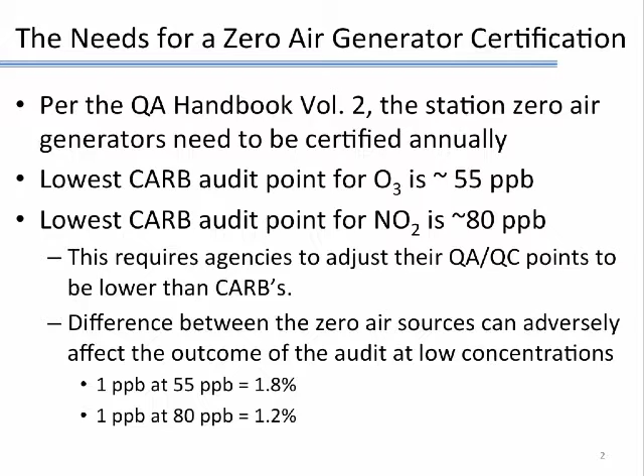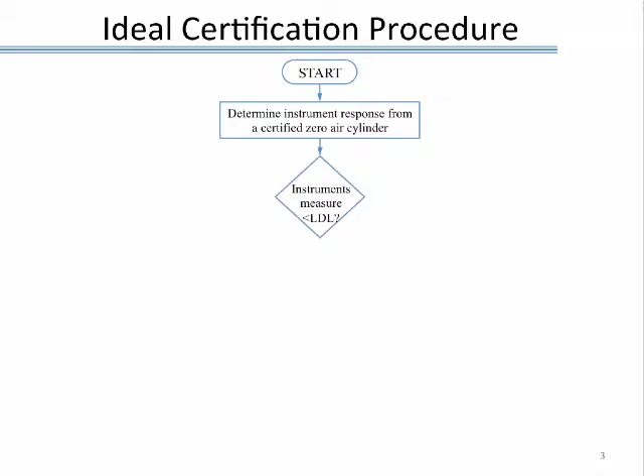So what is the ideal certification procedure? Well, first, we're going to determine the instrument's response from, say, a certified zero air cylinder. Then we're going to determine, is the instrument measuring below the lower detection limit? If the answer is yes, that's great. Then we can go on and compare the instrument's response to the zero air generator.

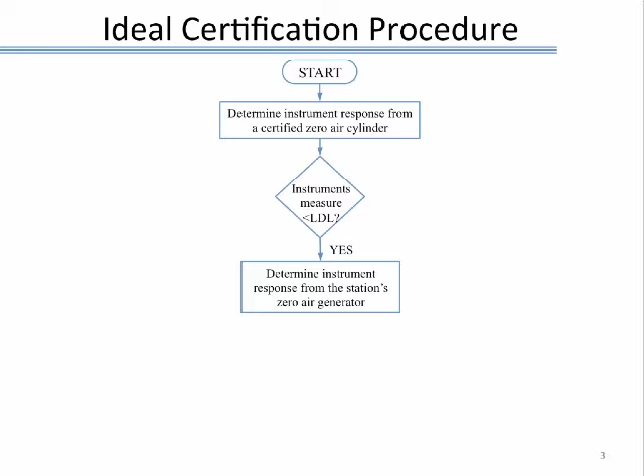If the answer is no, because this is a certified zero air cylinder, we know that this elevated zero is really just due to probably a calibration error, calibrating a little high, or maybe the instrument drifted. So now you can just adjust the background coefficients or the zero coefficients, and then directly move on to determine the response from the zero air generator.

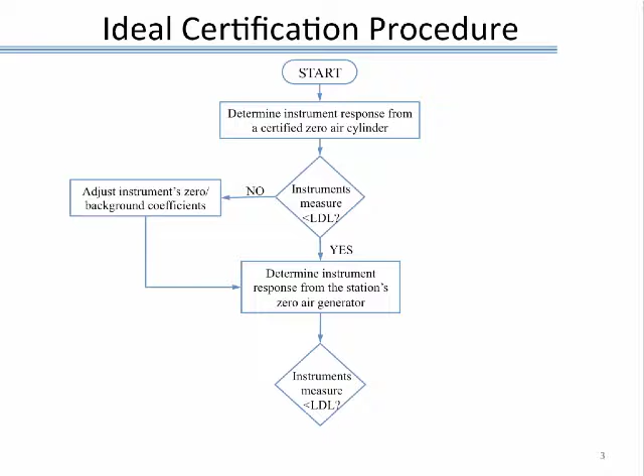Now, when you do that, you can ask yourself, is the response from the zero air generator less than the lower detection limit? If the answer is yes, then you know that your zero air generator is certified to be clean and you can move on. If the answer is no, then you need to maybe make some modification to your zero air generator.

Maybe the scrubbers need to be changed. Maybe the zero air generator is just not up to spec. Maybe you have an older version. Maybe you need to buy a new one.

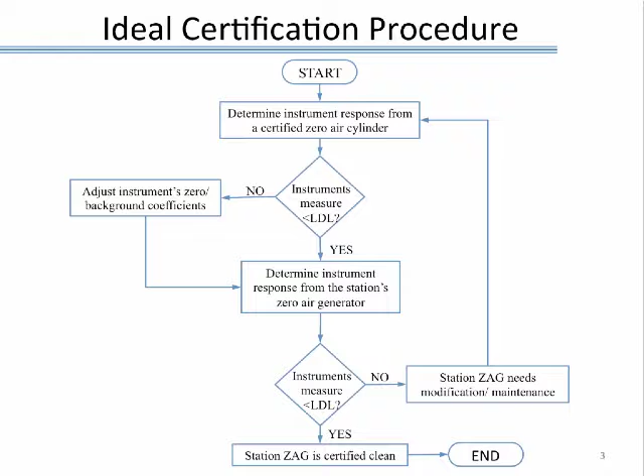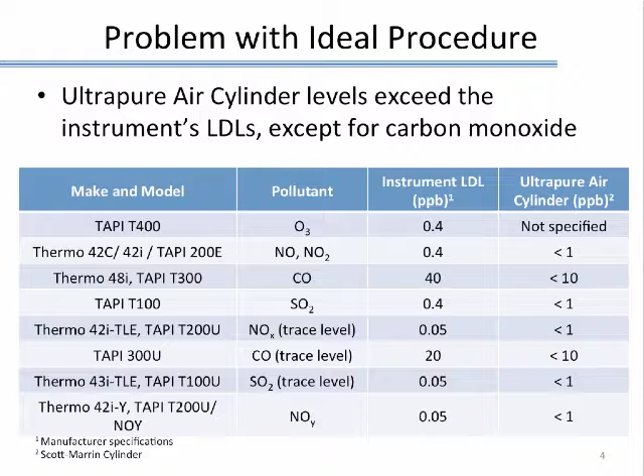So San Diego decided, you know what, we're going to get rid of the cylinder and we're going to come up with our own procedure. Our own procedure is we're going to take the best available zero air generator that's on the market, and we're going to connect that to a clean sampling manifold that's only used in this certification process. We're going to analyze the output from this, what we now are going to call a reference zero air generator.

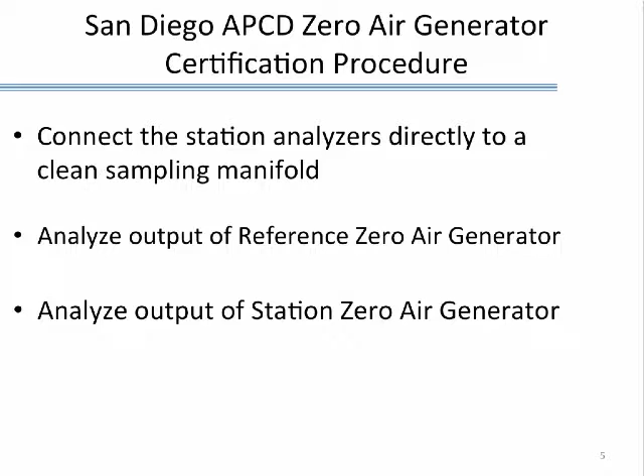We're then going to disconnect that and connect up our station zero air generator and analyze the instrument's response to that. Then what we're going to do is take the output of the station zero air generator and run it through an external scrubber system to see if just running it through additional scrubbers will lower the concentrations.

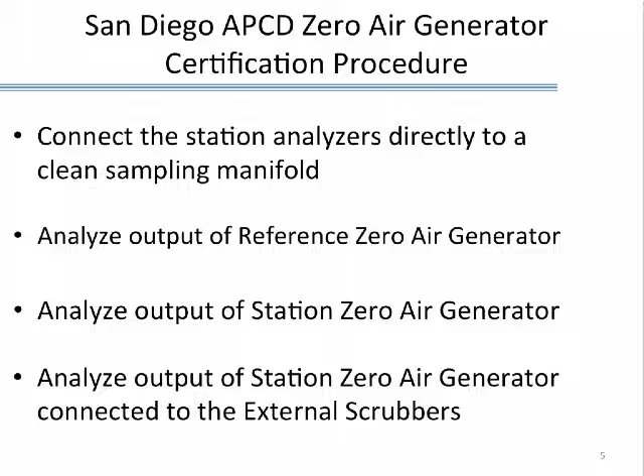So how did we come up with what was the best available technology? This is just a little table here of different instruments. You've got the cylinder there from Scott-Marrin, based in Riverside. You also have 3 manufacturers there. And the one that we decided to go to was the Teledyne API 701H.

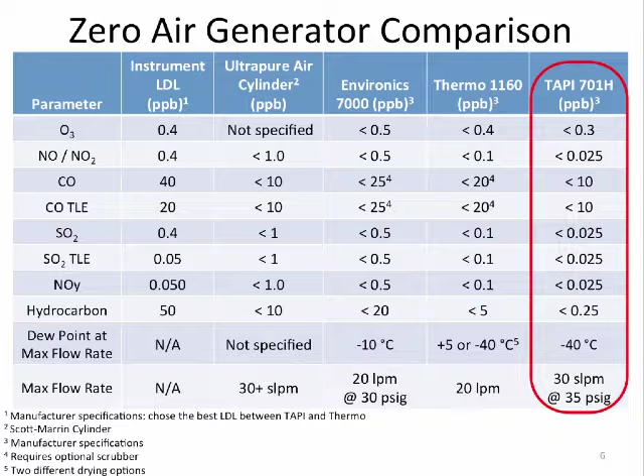And one of the things that we wanted to do when we looked at what is for our external scrubber system, we wanted something that was really simple. We wanted something that's portable. We don't want to have, if we have 9, 10 stations, we didn't want to have 10 of these. We wanted to have one of them. So we wanted to have something that was easily portable. We also wanted something that we don't have to be super cautious with, like using a hydrocarbon scrubber that has to heat up to 300 degrees C. So we wanted something very simple.

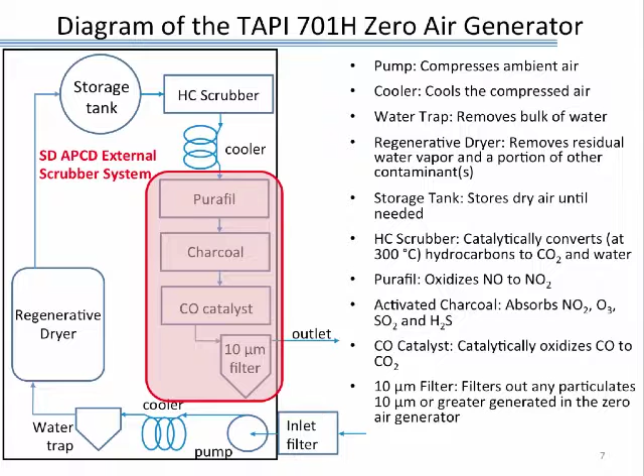So what we did was we took all the scrubbers out of the 701H that didn't need any electricity, and we just mounted that onto a board.

So here's our setup of our procedure. Here what we do is we can connect either the station or the reference zero generator to a valve to throttle back and give us just the amount of flow that we need, into an 8-port glass manifold that we connect our instruments to. This particular site has NOx, CO, SO2, and ozone.

We plug the other ports except for one last one, which we connect to a rotameter, and we measure the excess flow there. The reason we measure the excess flow instead of just feeling for it with our hand is that there is such a thing as too much excess flow. If you have too much excess flow, you end up building up pressure in the glass manifold, and that affects your ozone instrument tremendously.

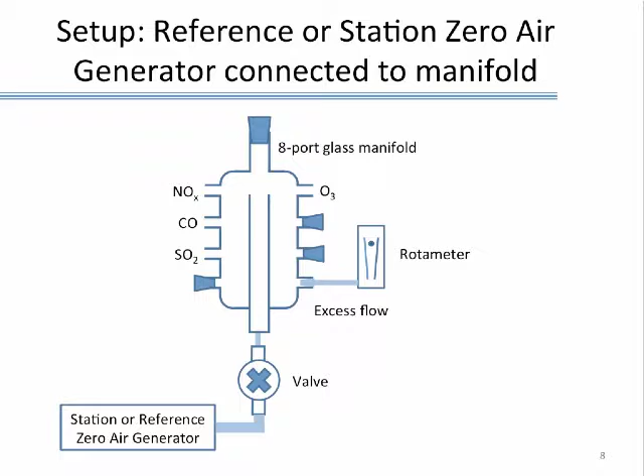So if you have a really high flow in there, you'll end up getting a really big negative spike on your ozone reading. We've seen it down to negative 10 ppb, and it takes about an hour before it reaches zero again. So you definitely want to make sure that you don't overpressurize that cell.

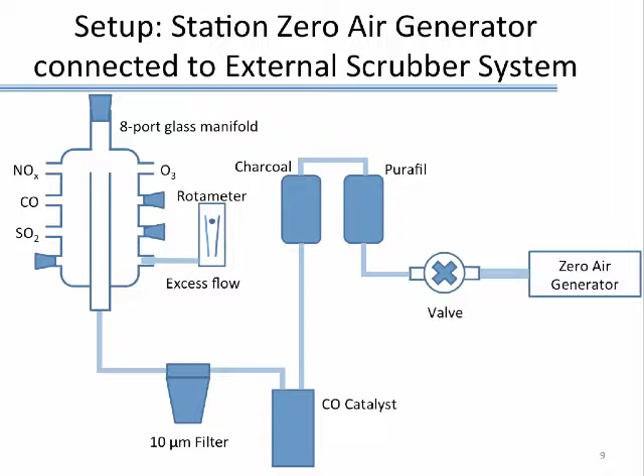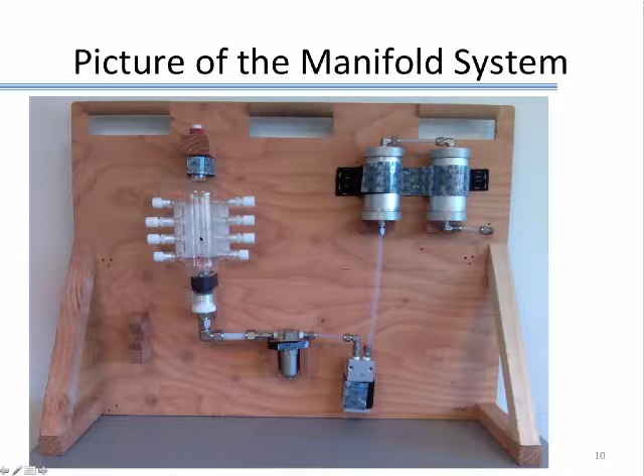So the other thing that we decided to do, to ensure that our reference zero generator is running optimally, is to change out the scrubbers on a pretty quick basis. In reading the manual on the 701H, it tells you that you should change out the Purafil and the activated charcoal on a yearly basis. So we're going to do that for the station as well as the reference zero generator.

The CO catalyst and the molecular sieve, they pretty much said those are good for the life of the instrument, but they can become poisoned, so you should change those out periodically. On our reference unit, we're going to change those out yearly. On our station units, we're going to change those out every 2 years. And the external scrubber system, since it's only used for a short period of time, just a few times during the year, we're going to basically take the ambient station schedule and double that.

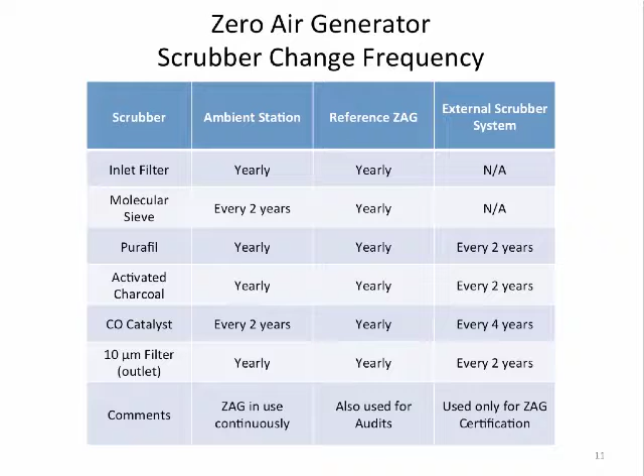The other thing we did was we developed QA/QC criteria for what constitutes a pass and what constitutes a fail. One of the things we wanted to address is that when we measure the value of the reference or the instrument's response from the reference or the station, that value needs to take into account instrument drift. Maybe you calibrate, maybe you've got an older ozone instrument and you can't get a perfect zero, so you calibrate it with the zero being 1 or 2 ppb. So we want to take into account instrument drift.

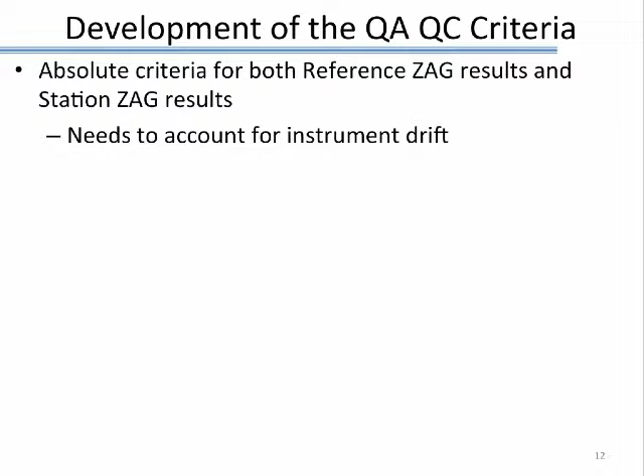So what we did for the zero generator certification was take our as-is calibration limits. For ozone and NOx, that's plus or minus 5 ppb, and for CO, that's plus or minus 0.6. This takes into account our final calibration zero limit tolerance, as well as the EPA 24-hour drift requirement, which is plus or minus 3 ppb for ozone and NOx, and 0.4 ppm for CO.

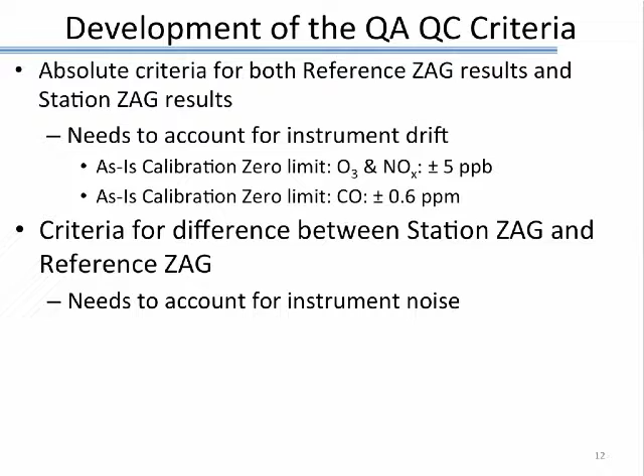The other thing we wanted to do is, if we measure the reference zero generator and measure the station, the difference between them needs to be within a certain amount, and that needs to take into account the instrument noise. Everybody knows that when you measure zero on an instrument, it doesn't read just zero—it bounces up and down. So we need to take into account the instrument noise. What we did was take 3 times the RMS noise, and the RMS noise of each instrument is a manufacturer's specification.

So we felt testing 3 times would give us a good idea that there is a real difference between the two zero generators.

The other thing we wanted to know is if we took that station zero generator and ran it through additional scrubbers, and if that value dropped significantly, that indicates the station zero generator needs either servicing, maintenance, or replacement. So what is that value? Well, it needs to take into account instrument noise, and again, we chose 3 times the RMS noise.

So this is just going to be a flow chart that goes through those criteria and how we determine if it passes or fails.

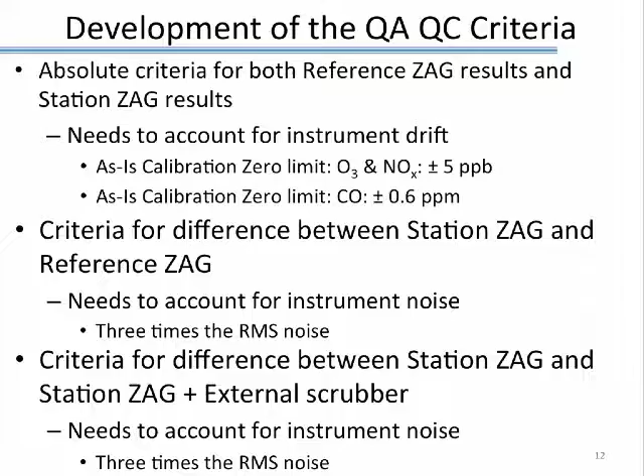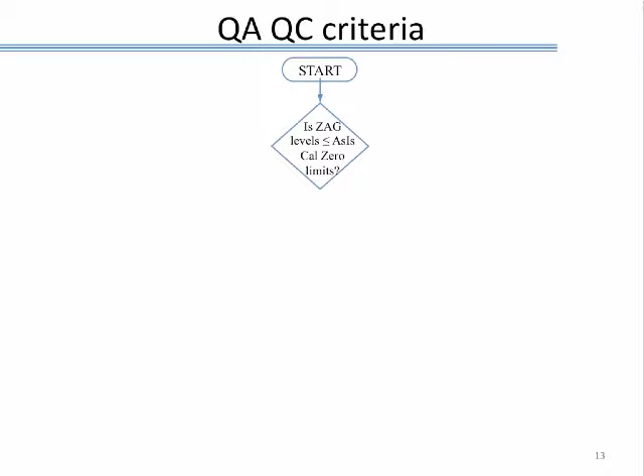The first thing we do is run the reference zero generator and get the instrument's response to that. Then we look at those values: is that value less than or equal to our as-is calibration limits? If the answer is no, then there's something already wrong, and you need to address that issue, investigate it, maybe issue a corrective action notification, resolve the issue, and then start over.

Let's say the reference value is less than the cal limits, and the station is less than the cal limits. Now we look at the difference: the response from the station zero generator minus the reference zero generator. Is that less than negative 3 times the noise?

If that difference, the station minus the reference, is less than negative 3 times the noise, what that indicates is that the station value is much less than the reference value. Well, we've already decided that the reference one is the best in the network, so how can we have a station one that's less than that? That indicates something is wrong. This could mean your reference zero generator needs its scrubber changed, maybe it got contaminated. So replace it, fix it, and start over.

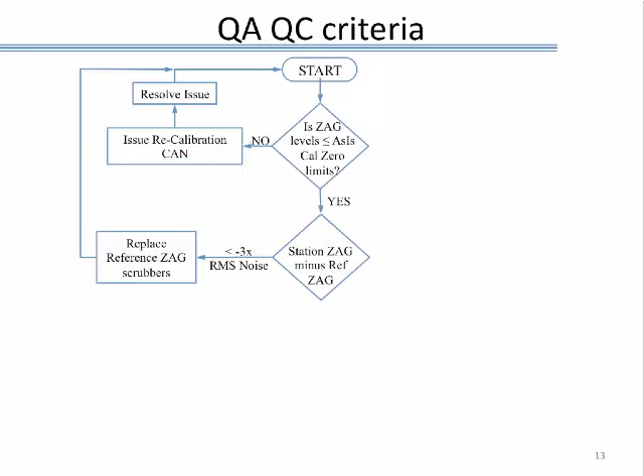Let's say it's greater than 3 times the noise. What this means is that the response due to the reference zero generator is much less than the station, so the station is reading significantly higher. This indicates that if you had an identical reference instrument as a station one, you would get better zeros. If it's the same model number, then most likely it means you need to change out your scrubbers.

So let's say it's in between, plus or minus 3 times the noise. Now we can move on to the next step, which is looking at the response of the instruments when they measure the station zero generator versus when they measure the station zero generator coupled with this external scrubber system.

Let's say it's less than negative 3 times the RMS noise again. This indicates that the response when measuring just the station zero generator is significantly lower than when measuring it through the same station zero generator coupled with an external scrubber system. If you scrub it more, it should be lower, so how can it be higher? This indicates maybe you have a leak in your external scrubber system, or maybe they're poisoned or contaminating. This needs to be resolved, and again, start over.

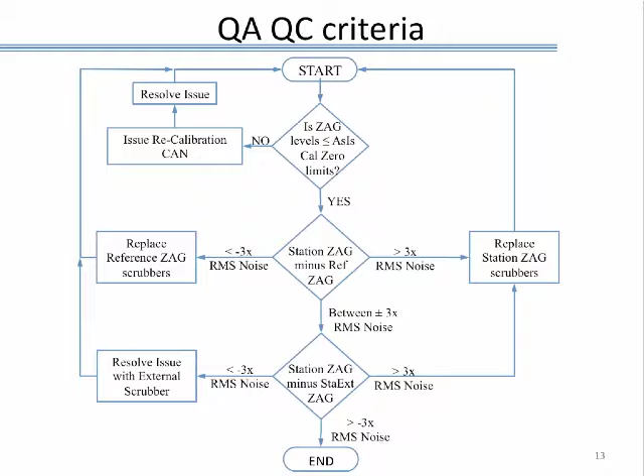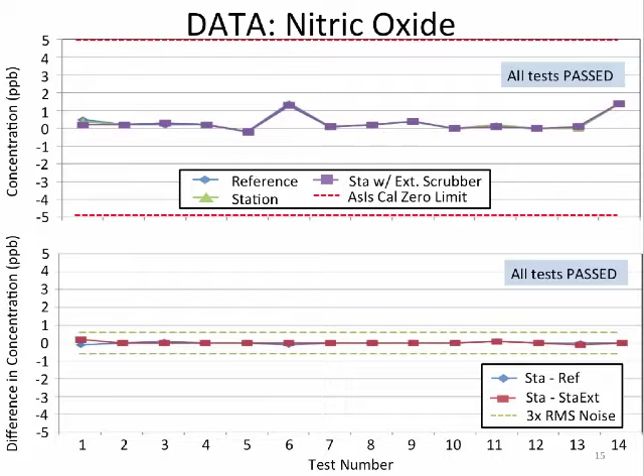Now, what's the cause of this? Well, before we started this, we had our site operators change out the scrubbers on our zero generator once a year, but we really didn't enforce it. It had to be the same month every year. And our site operators change stations every year, they get rotated.

So some sites have more equipment than other sites. Instead of penalizing one person because he's got the NCore site, and one guy's just got the ozone site, they get rotated around. So it's really up to each operator to see when was the last time it got changed. And sometimes things get busy, special projects happen, and it might go 15, 16, 17 months before the scrubbers get changed. That's probably what happened here.

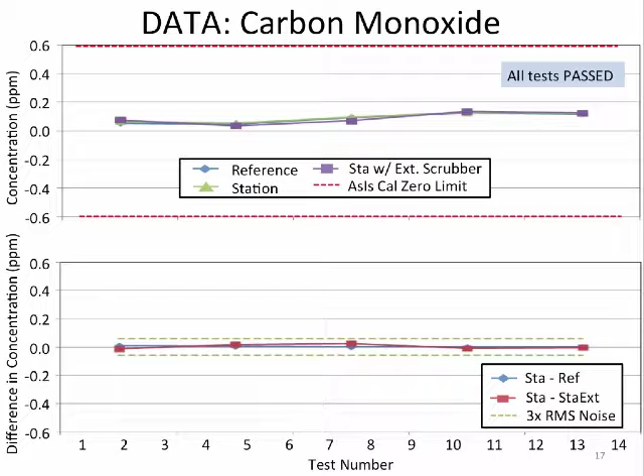So summary and recommendations. Lower QA levels are requiring lower QC levels. Newer technology instruments are making it harder and harder to use the zero air cylinders as your reference source.

Our recommendation is to conduct a certification in a dedicated manifold. That way you don't have to worry about cleaning it to prevent contamination and bias. And really try not to overpressurize it. If you overpressurize, your ozone's going to go really, really negative, and it's going to take a long time.

So what we typically do is run for at least 30 minutes and then take a 10-minute average. But if you overpressurize it, it might take an hour or over an hour. And some of our early tests, we probably did overpressurize it because we weren't measuring our excess flow. That's probably why, if we look back real quick at ozone...

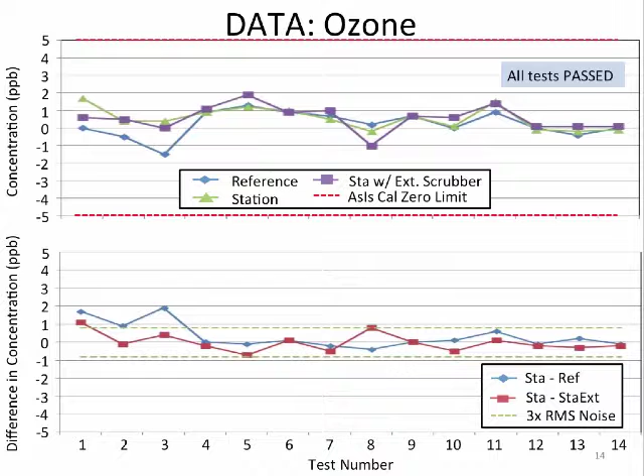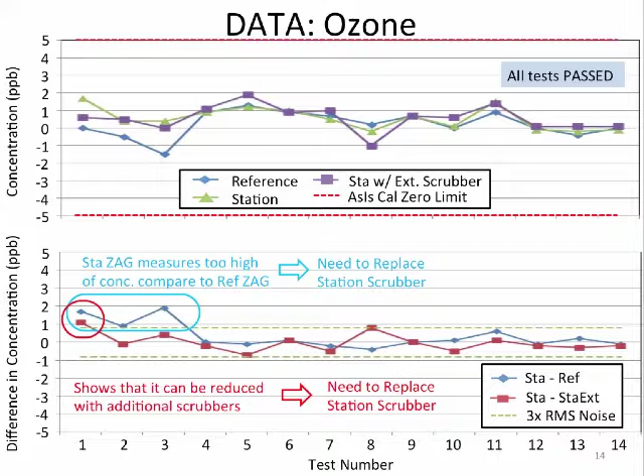On this third test, look at our reference, we're getting about negative 1.5. That probably isn't real. But when we were doing this, we ran for 30, 40 minutes, and we got 10 minutes where it was sitting at negative 1.5, or negative 1, negative 2. If we waited maybe another 10, 20 minutes, maybe it would have been closer to 0. So really don't overpressurize it. We found about 2 or 3 liters per minute of excess is good.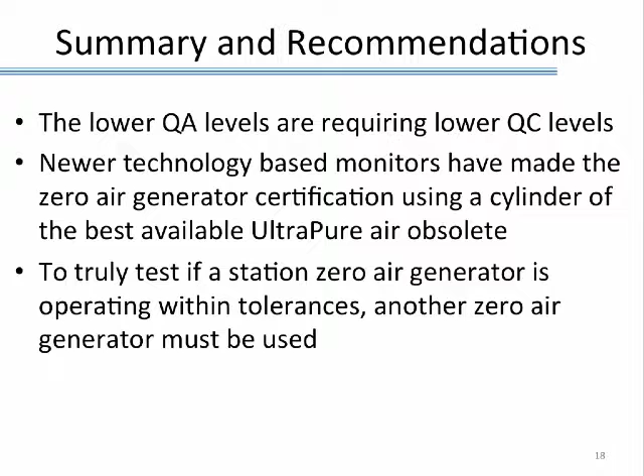And just as a disclaimer, this is something we worked on. We sent our SOP that pretty much encompasses this whole presentation up to EPA. We haven't heard anything good, bad, or indifferent from them, but they are aware that we're doing this. And with that, I think we have maybe time for a couple questions.

Yes, we got one in the back. I was just curious, for auditing groups like the ARB or EPA, if there's a certification process for their zero air supply used during audits.

When they come and audit us, they haven't done a certification process on our zeros. I mean, when they do, like say ozone, they'll do a zero before and after, and they do have criteria on what those zeros should be, but they're not looking at a certification process on that. Right now, the way we certify it is our zero air system is checked using an ultra-pure cylinder. Knowing what we know about those cylinders, we are going to have to develop a system to check our system in addition to what we currently do.